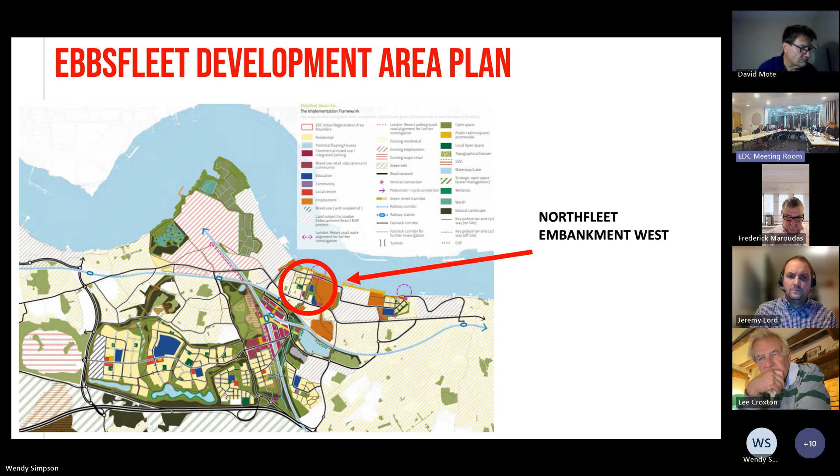The vacant and derelict Bevan's Jetty is also seen within the River Thames to the north.

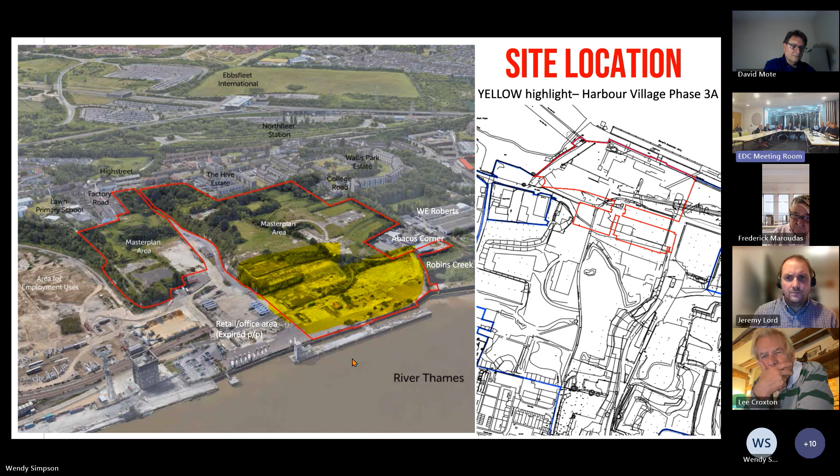The key matters for the development relate to the creation of a sustainable and high quality riverside place, including new dwellings and open space, the living conditions of future occupiers of the proposed units, the impact of the development on the living conditions of residential neighbours, the impact on non-residential neighbours, matters of flood risk, impact on highways, as well as matters of ecology and heritage interests of the area.

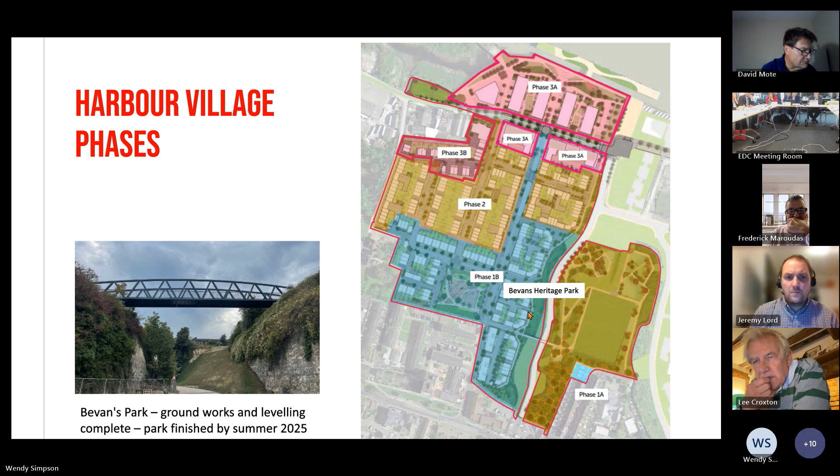This slide shows the proposed layout with 7 buildings, 5 to the north of the new fast track route that will run through the site, and 2 to the south of the fast track route.

All of these blocks meet the height of the approved parameter plans, arranged from 4 stories in the southern area, rising to 5 and then 9 stories, with a 9-story landmark tower facing more towards Robins Creek in the northern sector.

Blocks D, E, F and G have podium level gardens, communal gardens for residents on the roof of parking areas.

Adjacent to Robins Creek and the River Thames, there is public open space in the form of a promenade park, through which the King Charles III England Coast Path will be routed.

Starting with the northern part of the site, the ground floor layout of the buildings comprises internal parking areas, entrance lobbies, cycle parking, ancillary plant rooms and bin stores, and also a significant amount of active frontage onto the public realm and the streets.

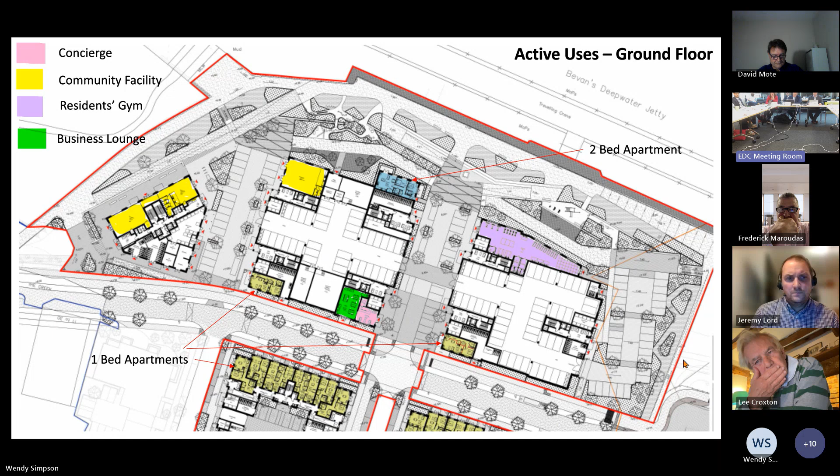This slide just shows some of the active frontage areas.

The design narrative for this northern part of the site responds to the industrial riverside character area within the master plan. The design of the 4 blocks D to G invokes a sense of historic riverside warehousing, with equal spacing, repetition of built form, ranging perpendicular to the riverfront. The linear form of the buildings, construction, and intelligent detailing draws on gable roof forms with chimneys.

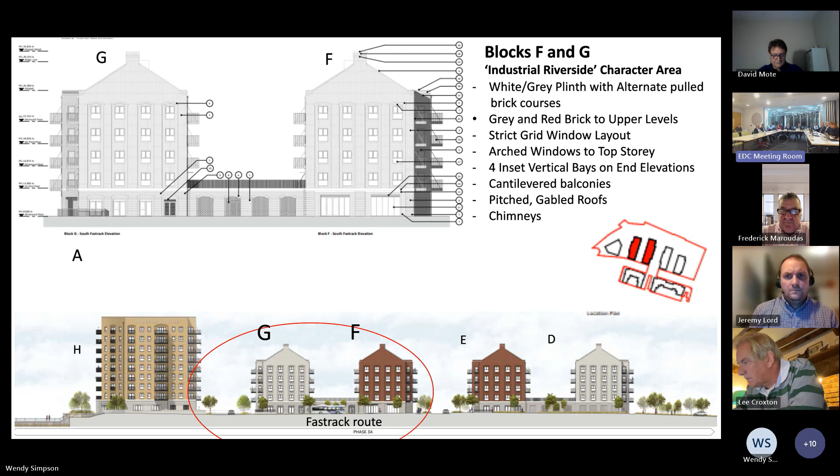This slide illustrates some of the careful detailing of the entrances, showing the high quality finish proposed for the built form.

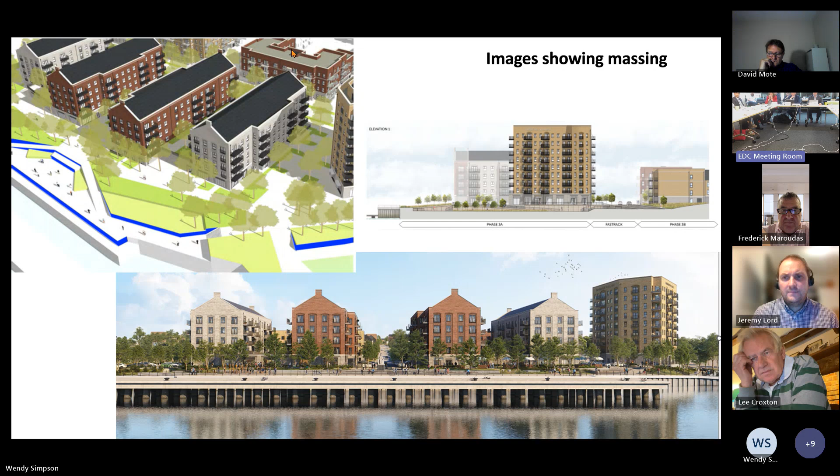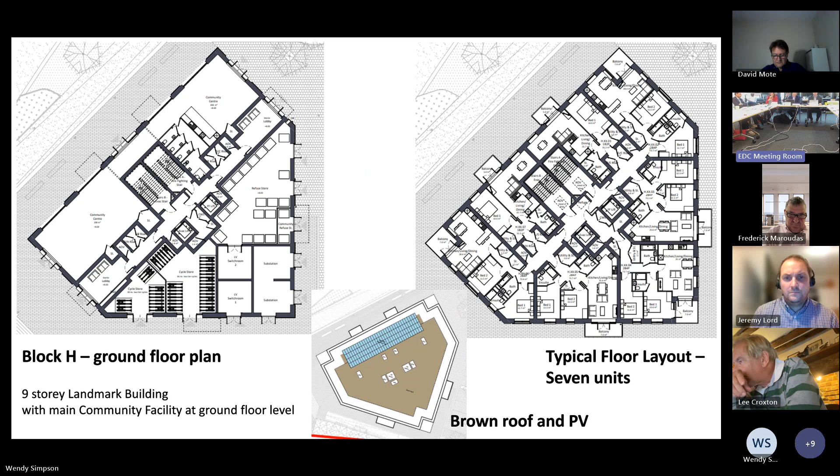On the pitched roofs, blocks D to G would have PV panels.

The design of the landmark tower is seen here with large distinctive signage on the 2 facades, referencing industrial warehousing.

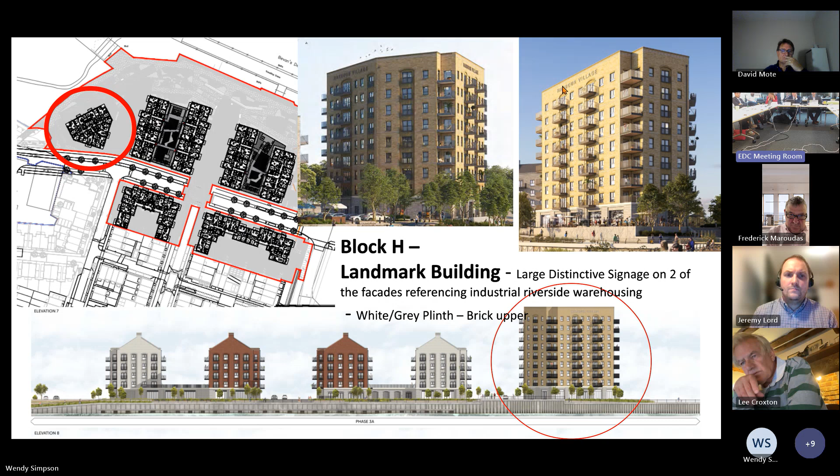The Riverside Promenade Park has had to be carefully planned to provide a green and high quality public realm with the various requirements of the park, such as heritage boards, play and gym equipment and artwork, while also providing level access with the Environment Agency to access the existing flood defences.

As the site is located in flood zone 3, buildings have a finished floor level of 8 metres AOD, and a series of steps and slopes provide access down to the England Coast Path level.

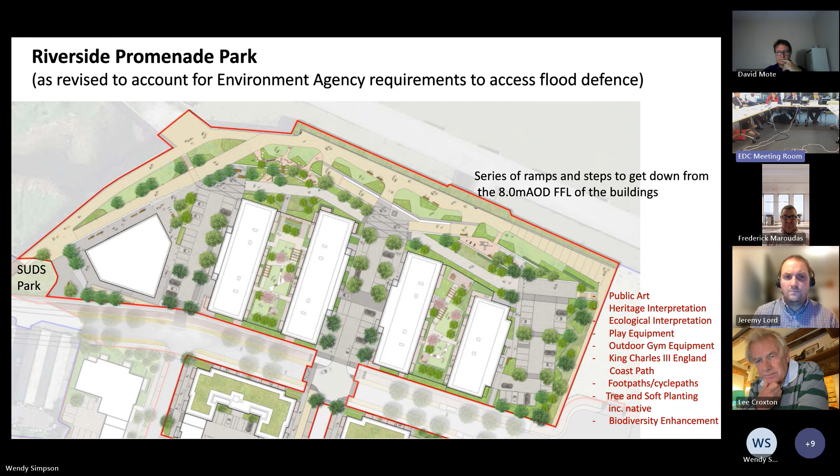This slide shows some of the tracking for the operational vehicles that are required to access the flood defences for repair and maintenance associated with the Environment Agency.

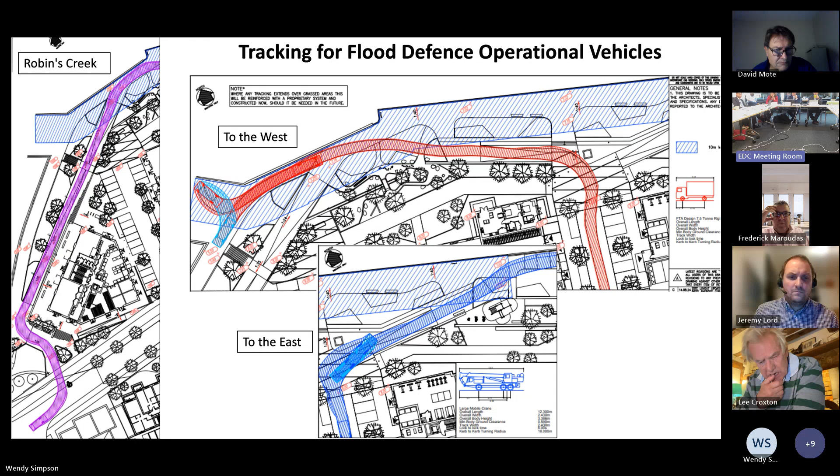We then have this slide showing the routing of refuse and emergency vehicles by what is otherwise a dedicated footway cycleway to the north of the buildings, and at all other times this is to be a blocked, bollarded and locked route.

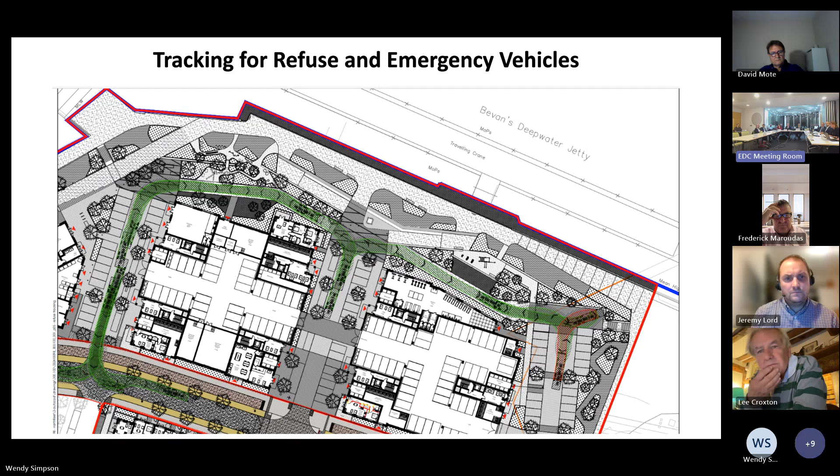This slide illustrates some of the changing levels from block H of the community facility down to the riverside. It also has a flood defence operational area, which is level for an Environment Agency requirement, but still incorporates lawn and shrub planting and requires installation of demountable street furniture within that zone.

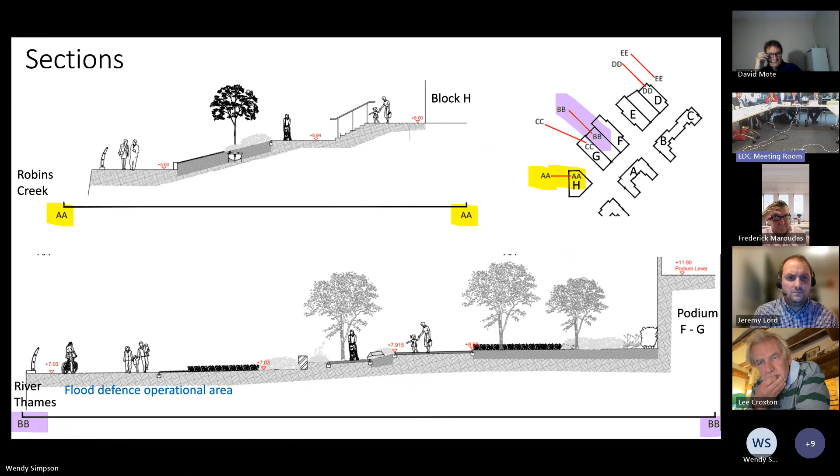This slide shows the configuration of the community facility. The planning condition on the outline requires provision of 250 square metres minimum for the community facility. There is about 300 square metres shown here, divided between buildings H and G. There are 3 parking spaces provided for dedicated use of the community facility, and suggested condition 23 requires agreement of a community building management plan.

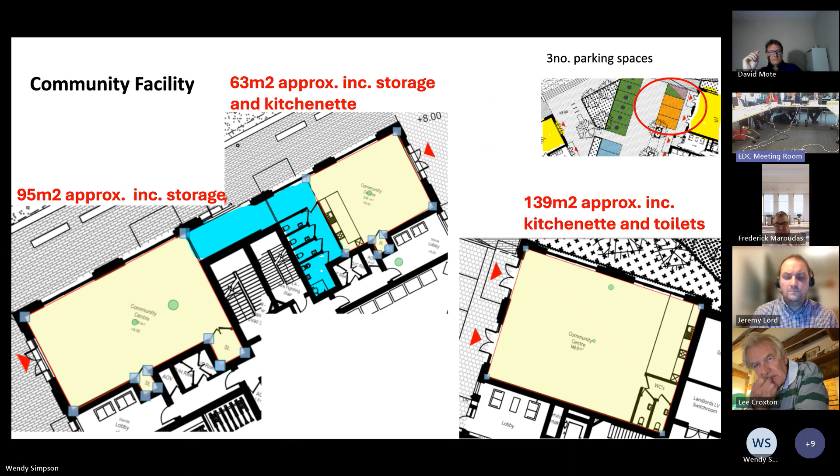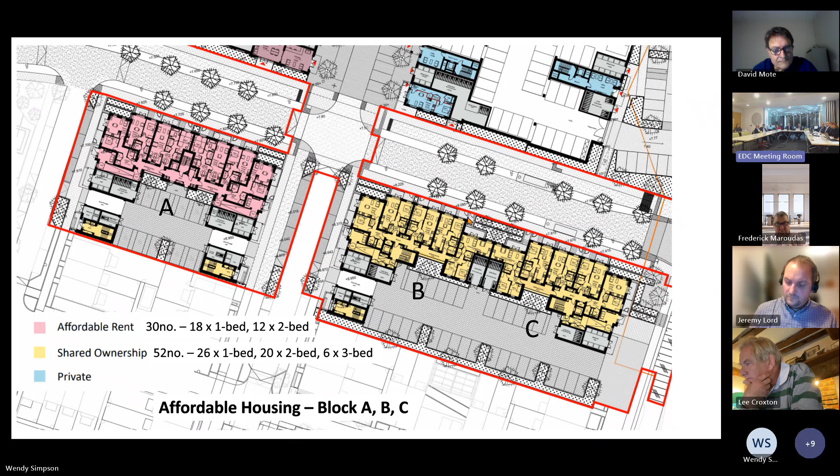In the southern part of the site, block A will provide 30 units of affordable rent, and B and C will provide 52 units of shared ownership. This altogether equates to 30% affordable housing in a tenure split in accordance with the Section 106. In block A, there are 8 M4 Part 3 units, housing for people with mobility issues, which is 2 more than the requirement of 6 in the Section 106.

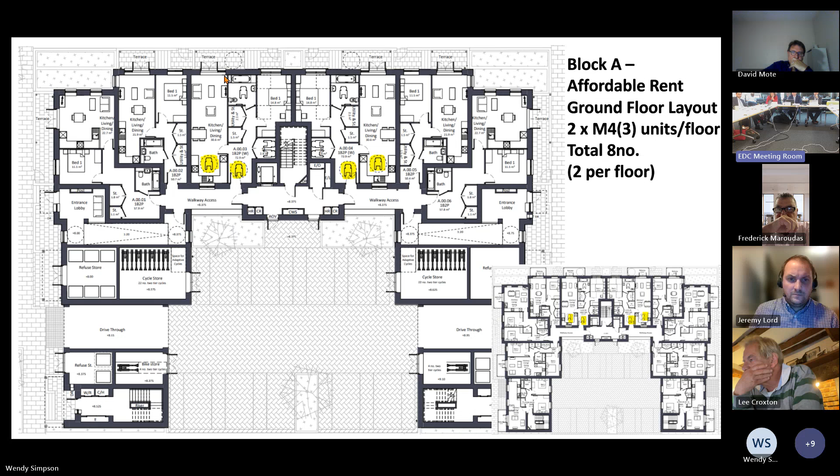The majority of apartments within blocks A, B and C are dual aspect to provide better living conditions for occupiers. The ground floor apartments have direct access to the street, increasing their usability and street level activity. Architecturally, these 2 blocks respond well to the Georgian Town Character Area brief within the master plan. The bottom picture shows the direct access of the ground floor level unit to the street.

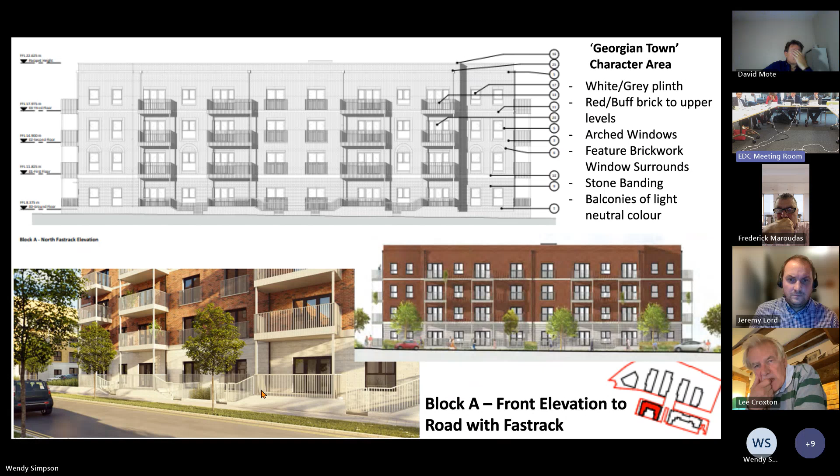At the bottom part here, you can see how the building responds to the phase 2 buildings, which are houses, with a slight step down in stories to the rear.

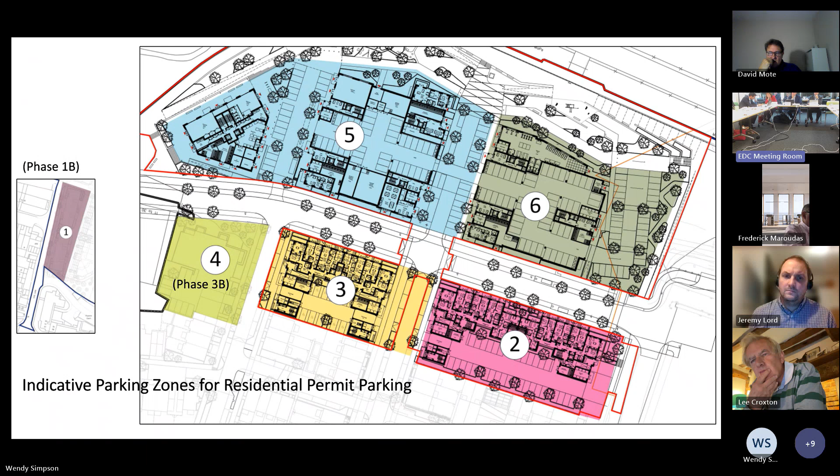What we have here are the 6 indicative parking zones for those who have parking permits and live within the development. About 86 of the units are car-free units. In addition to the parking spaces, the applicant has agreed payment of a unilateral undertaking to Gravesham Borough Council to potentially install and manage a controlled parking zone within adjacent neighbouring streets. Within the site itself, all streets are to be retained in private ownership, and there's a suggested condition for a parking management plan.

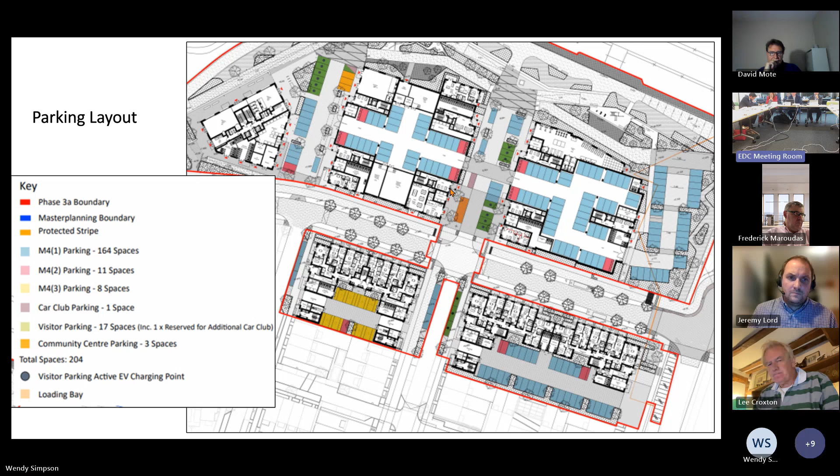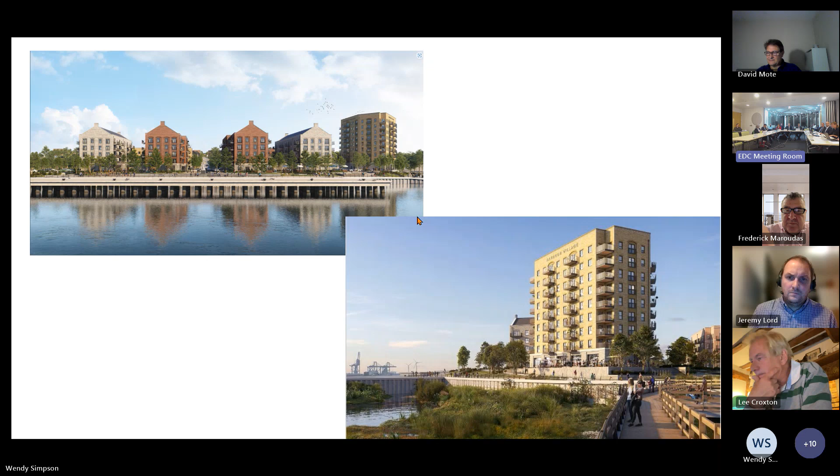Overall, the proposal performs well against the building topics, with 10 greens and 2 ambers. It broadly accords with the principles and parameters established by the Outline Planning Permission, the Master Plan and planning policies, as well as meeting EDC's aspirations for the Northfleet Riverside, for high quality residential development and community facility. This application is accordingly recommended for approval, subject to the conditions laid out in the report and the planning obligations set out.

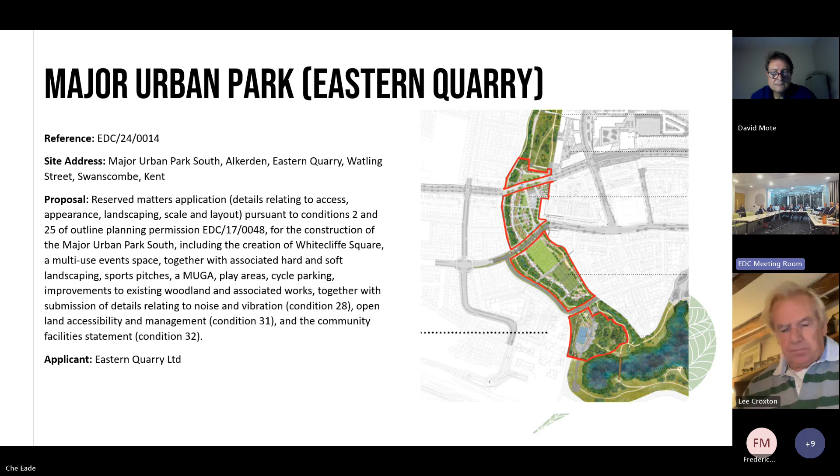The application is made in pursuant to conditions 2 and 25 of Eastern Quarry Outline Permission. The site is located within the Eastern Quarry, also known as Whitecliffe, which forms a strategic development site within the EDC area, comprising 3 urban villages: Ashmere, Alkerden and Castle Hill. Built-up areas are separated by accessible open space, including the major urban park situated between Alkerden and Ashmere. The master plan for Whitecliffe embeds principles of sustainability, creating walkable neighbourhoods, ensuring this leading outdoor space will be within a 10-minute walk for most residents within Eastern Quarry.

The fast-track bus service also runs through the centre of the site, intersecting the park, facilitating easy access via public transport from neighbouring communities in both Dartford and Gravesham. The site encompasses the southern phases of the major urban park between the market centre and approved Alkerden South residential phase to the east, and the future phases of Ashmere to the west, and extends approximately 5.5 hectares. It broadly forms a linear corridor which is subdivided by 3 roads: Fast Track, the Primary Road South, and Alkerden South Secondary Street.

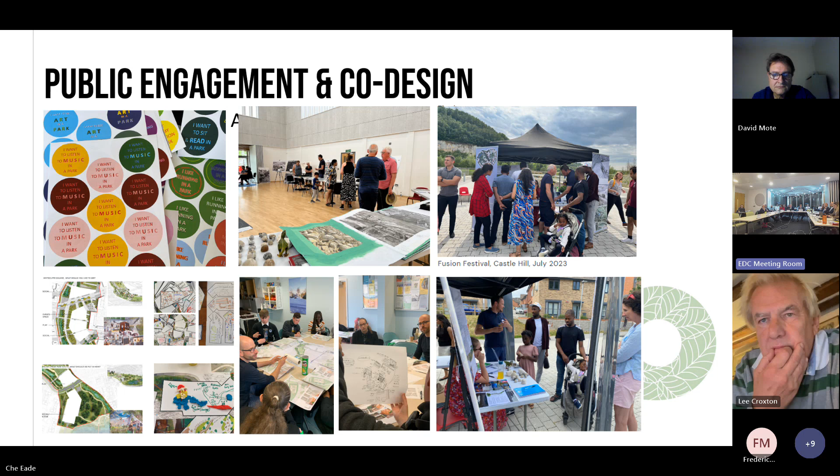Before we get into the detail of the scheme, I'd like to highlight that the design of the park and its facilities have been influenced by community feedback captured through a well-publicised programme of public engagement events and co-design workshops undertaken by the applicant's team. This has shaped the proposals, including provision of a wheelchair accessible community garden, teen-focused social spaces, skate park elements and basketball MUGA. Opportunities for further co-design are also identified by the applicants and have been secured by condition.

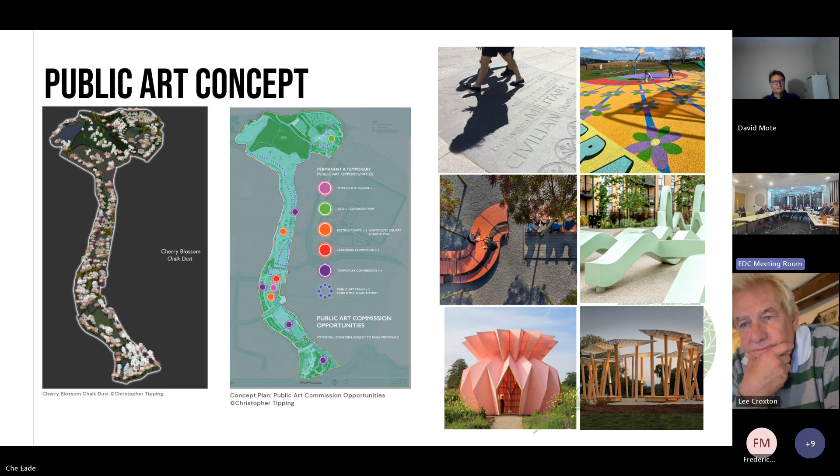The landscape design has also been influenced by the work of the principal artist, Christopher Tipping, reflecting the site's rich history and unique character. Chris has also worked with the designers to identify specific public art commissioning opportunities for the park as a whole, including a landmark canopy within the urban square, bespoke seating and embedded artworks which can link together, creating public art trails. An indicative delivery plan has been provided, which broadly accords with the Area Master Plan and Design Code and the overarching public art strategy secured by the Outline Planning Permission. Final design details and timings for delivery are secured by condition.

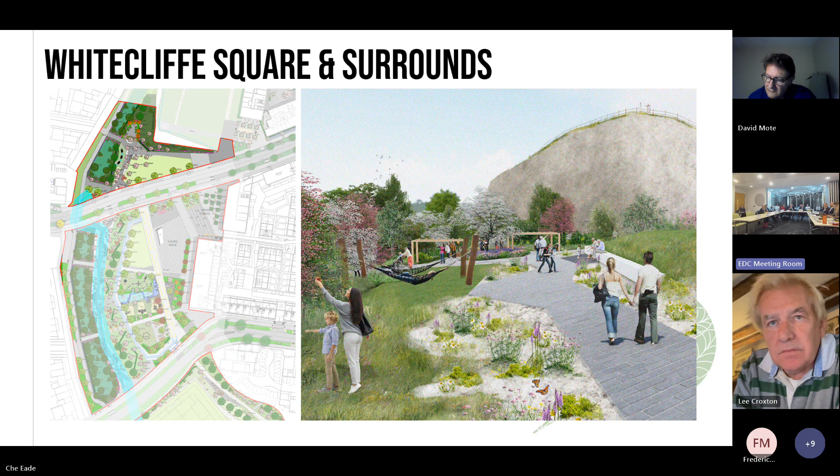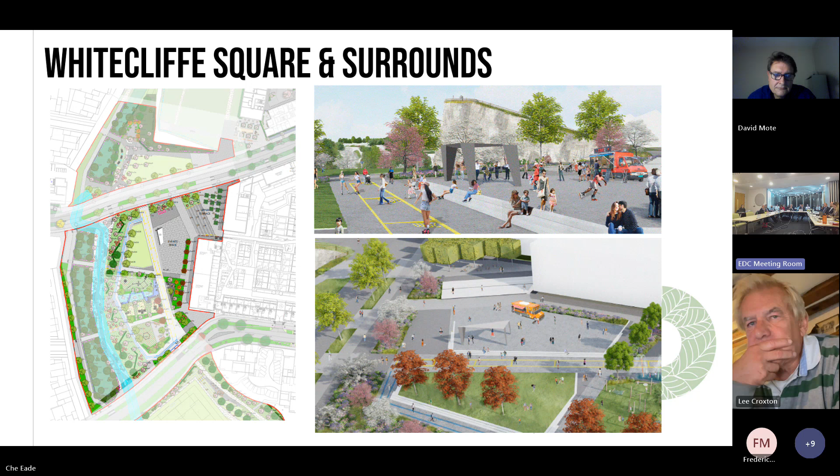South of Fast Track, Whitecliffe Urban Square provides a key hard landscaped community space which can accommodate various community events. This space is accompanied by grass lawns and cafe spill-out spaces from the adjoining market centre and the public art canopy structure previously referenced. Further south, the space accommodates the first play area, which utilises the quarry and character of the site. Motion-activated water play feeds into accessible water rills and collection pools and can be manipulated via mini dams.

Wheelchair-accessible play diggers will allow all children to take part in excavating and moving sand and play gravel, and concrete pipes are utilised throughout the space, providing opportunities for climbing, jumping and passing through. Beyond the principal play area, informally grouped lounge-style seating, pergola structures and a group swing have been incorporated with the Make Space for Girls campaign in mind.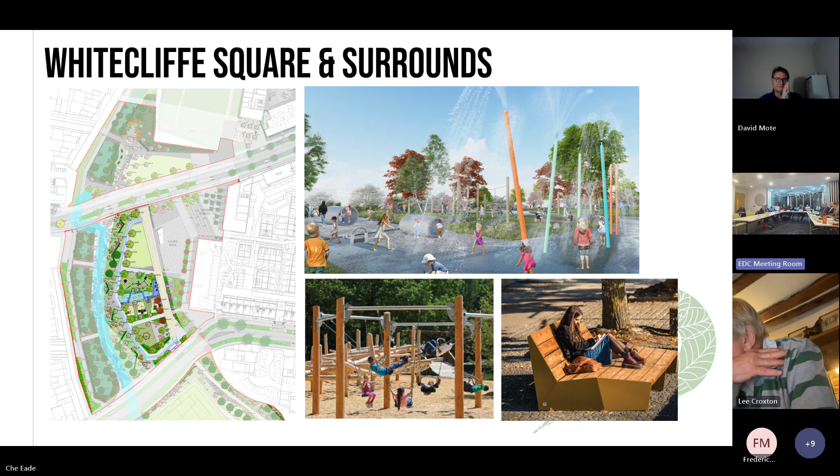To the south of Whitecliffe Square, a 9v9 grass football pitch has been designed for informal use by the public and should operate for the benefit of the whole community, not only for the playing of football. Four securely fenced tennis and netball courts will be available to members of the public via a booking system, similar to that established at Castle Hill tennis courts.

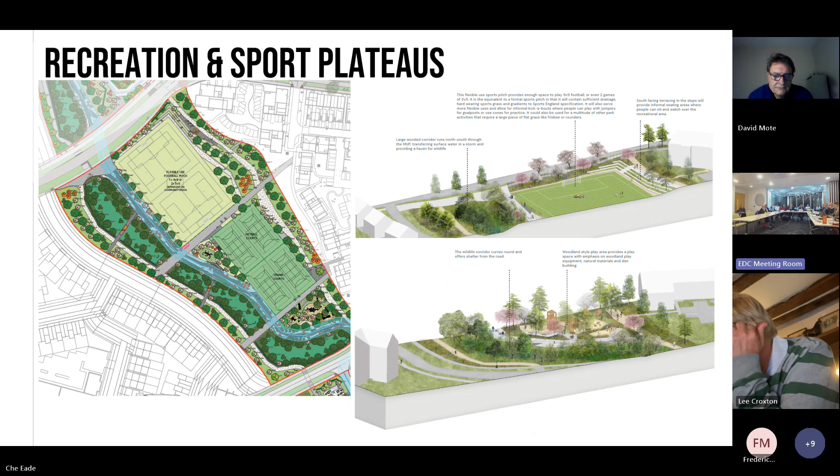West of the courts, an outdoor gym area is proposed, and beyond the courts to the south, a second neighbourhood-equipped play area is designed around woodland activities. Specification details for outdoor gym and play are secured by conditions, alongside full construction details of the sports pitch, courts and access and management plans.

To the southern extent of the park, a wheelchair accessible community garden has been co-designed with Ebbsfleet Design Group and Cement Fields, and will focus on the reuse of materials to provide planting containers and other elements.

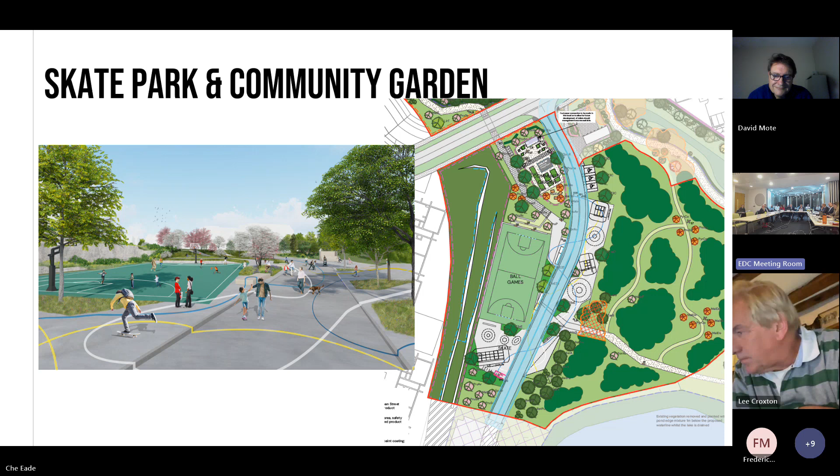Adjacent to this area, the basketball and 5-a-side football MUGA is proposed in an open court design to encourage a wider range of users. The MUGA is complemented by hard landscaping, playful line marking, skate park elements and robust street furniture, all aimed at young adults and teenagers.

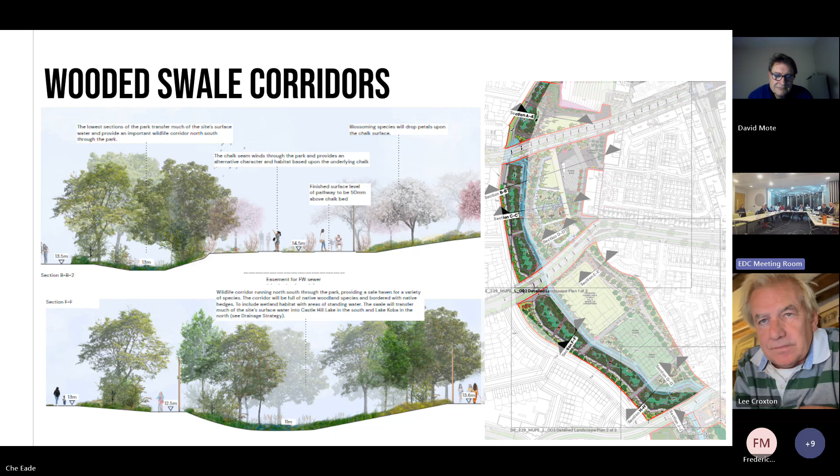Common design elements have been woven through the length of the park. These include wooded swale corridors which run along the western boundary and circulate the site's surface water. Adjoining the swales, the chalk seam walk winds through the park and is designed to provide an alternative walkway and a character and habitat based upon the underlying chalk of the quarry.

Soft landscaping has also been specified to dynamically reference the site's history through the use of flowering specimen trees, which in blossom will create a temporary spectacle reflecting Alkerden's heritage from fruit farming to chalk dust.

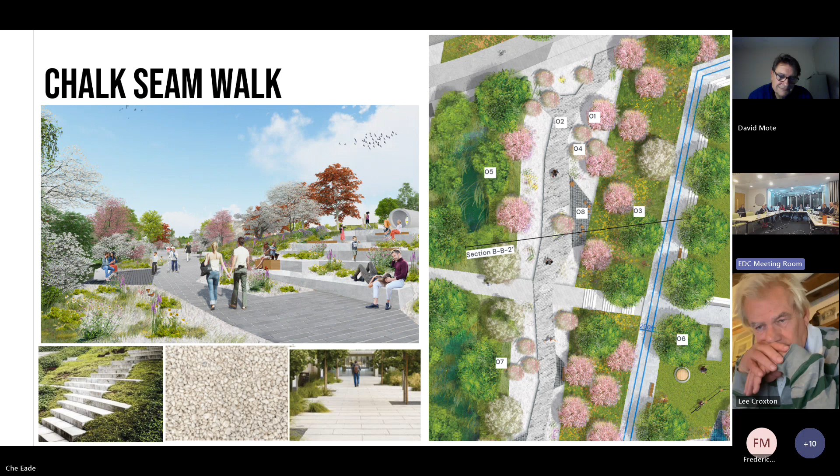Given the park is situated amongst residential development and integrated with Fastrack, most visitors will walk, cycle or take public transport. Thus, formal vehicle routes within the park are limited to a small section within the south of the scheme, serving 3 proposed disabled parking bays and the existing wastewater treatment works.

Numerous routes suitable for walking and cycling integrate well to the site-wide movement routes. Principal east-west connections are predominantly focused on pedestrian movement, while wide, informal leisure routes shared by pedestrians and cyclists run north to south on either side of the park. These connect into the circular leisure routes around Castle Hill, up to the market centre, and facilitate 2 points of connection for the Major Urban Park North scheme when that comes forward.

Cycle parking is also well provided for, with 115 cycle spaces provided across the key focal points.

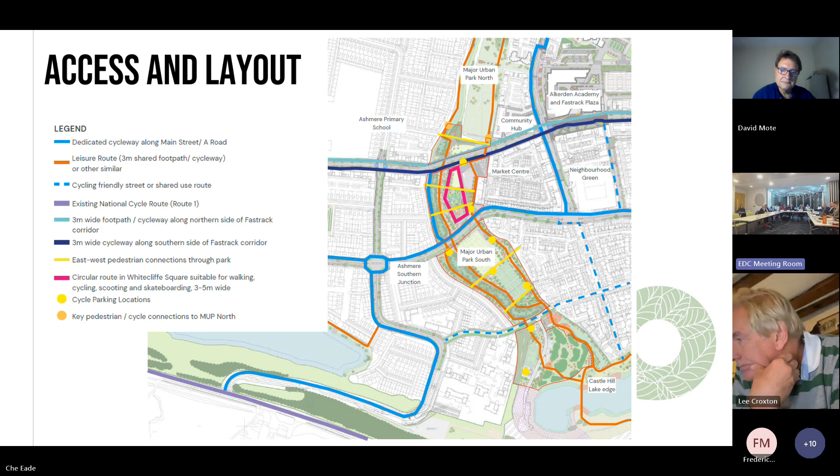Secured by design, safer parks and make space for girls design principles have been considered to improve the safety and inclusion of all users, especially women and girls. The design ensures all edges are well surveilled by adjoining residential and commercial developments. Active uses of facilities have been distributed through the park, which create a busier, active public realm where people can feel safe. Physical barriers around the football, basketball, Muga and skate areas have been removed to make these areas more attractive to a wider range of people, and planting is planned and managed to assist visibility.

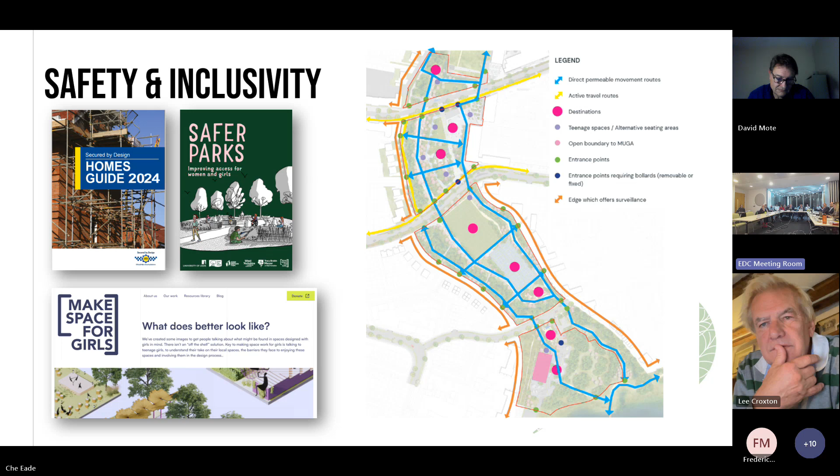Inclusive design has also been considered in a range of routes and spaces within the park, specifically catering for users with different neurodivergent needs, such as dementia and autism, and is considered to be accessible to an ageing population with minor design improvements secured by condition.

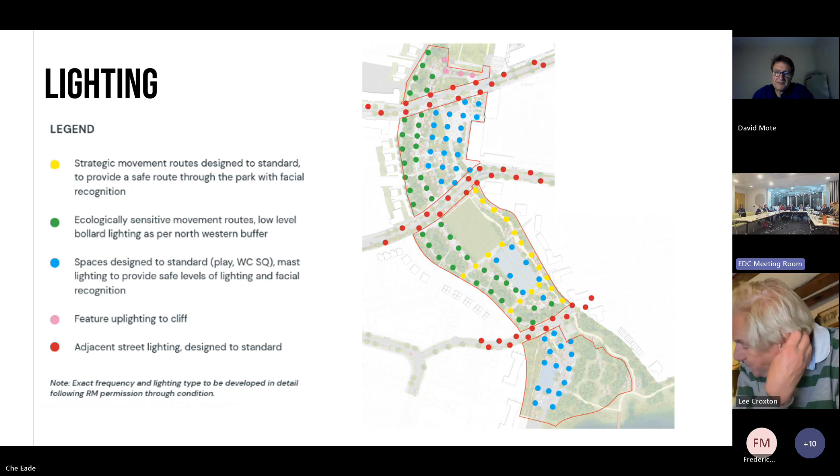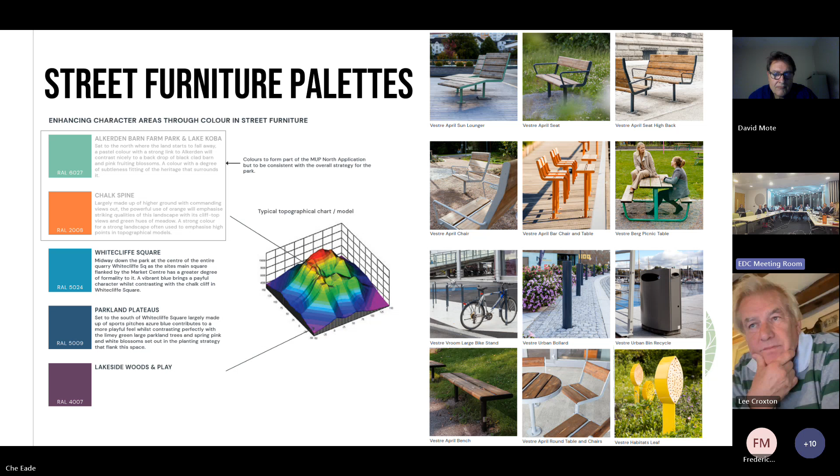The security of the park is also assisted by an appropriate lighting strategy, which includes low-level bollard lighting, pedestrian masts, and lighting to sports facilities, with detailed lighting plans to be secured by condition. These are complemented by a well-considered colourful street furniture concept for the full length of the park, zoning colours to enhance the different character areas and assist wayfinding.

Proposed planting across the park provides a great variety of flowering for pollinators and puts forward a strategy for natural regeneration, which should result in the best establishment of the right plants in the right place and resilient planting in terms of drought, biosecurity and ecology.

The proposed hard material palette is largely consistent with the materials previously used in the quarry, with additional clay pavers and crushed chalk as part of the distinctive chalk seam pathway, and black tarmac enlivened with colourful line marking as part of the youth and play areas. Final details and samples of hard surfacing materials, alongside detailed planting plans, are to be conditioned.

As summarised in the committee report, the design, layout and access to the proposed sports and recreational facilities are considered to be in general compliance with the requirements of the Section 106 and the Community and Leisure Facilities Strategy secured by the Outline Planning Permission.

Planning conditions are also proposed to secure that construction and surfacing will accord with relevant Sport England guidance.

In respect of sustainability, consideration is given to water consumption and carbon emissions associated with the construction and operational phases of the development. Planting has been designed to be low maintenance and drought tolerant. Water play elements use clean water supplies, which are less likely to become a future maintenance burden. Reductions have been made in the design process to reduce the overall hard landscaped areas and associated embodied carbon.

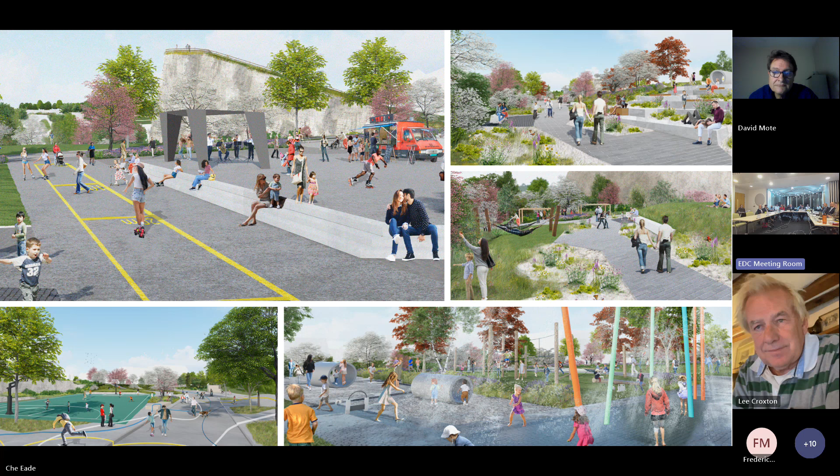Overall, the proposals are of an exceptionally high quality and provide a wide range of recreational function and facilities. The proposals align well with the Area Master Plan and Design Code for Alkerden, setting out a good quality design, achieving 10 out of 12 greens in the Building with Nature assessment and 41 greens across the 9 public health check indicators assessed as part of the Ebbsfleet Park and Open Space Design Criteria.

In conclusion, this is a positive and commendable scheme which will deliver a series of high quality, accessible, green and blue spaces for the growing community, and a significant piece of green infrastructure within Ebbsfleet. It is therefore recommended for approval, subject to the conditions detailed in the committee report and supplementary information.

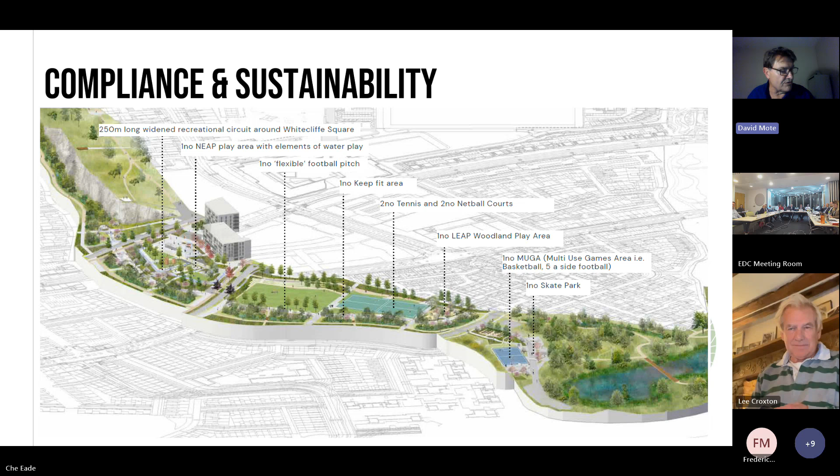So I also echo Neil's thoughts about access to this area from other areas. It was said that it will be easy, but I don't think it will be, to be honest, because all these routes run east to west. Very few run north into the existing communities, as far as I can see. So unless they drill a hole through the spine at Bluewater, it may not be quite as easy for people to access this from outside the area.

But it is there for the people in the area, because a lot of their management fee will be paying for this, along with other contributory factors. Sorry, I'm rambling, but my concern is that people attending or wanting to enjoy these areas from outside will drive there. And I have a bad feeling, like with the existing Castle Hill or its early stages, where people from surrounding areas parked all around residential areas to get to the new swings that were built there, because it was an exemplary play area everybody wanted to use. Is that being taken into consideration, or are we hoping everyone will walk there?

Che, perhaps you can answer this. It's close to the market centre where you're going to have a small town centre, so there will be public parking facilities as part of the market centre within Alkerden, adjoining the centre of the major urban park, to the south of this particular application site.

So that's where you'll have the opportunity for private parking vehicles. The residential schemes adjoining the park will have their own management scheme, with parking management regimes introduced as and when issues of indiscriminate or outside parking arise. I think it's reliant, within the existing phases of Castle Hill, on having some kind of parking management regime to prevent indiscriminate parking from outside the area, drawing people instead to access the park via sustainable modes - Fastrack, and the connections through from the north, which are expected from Swanscombe and Greenhithe as well.

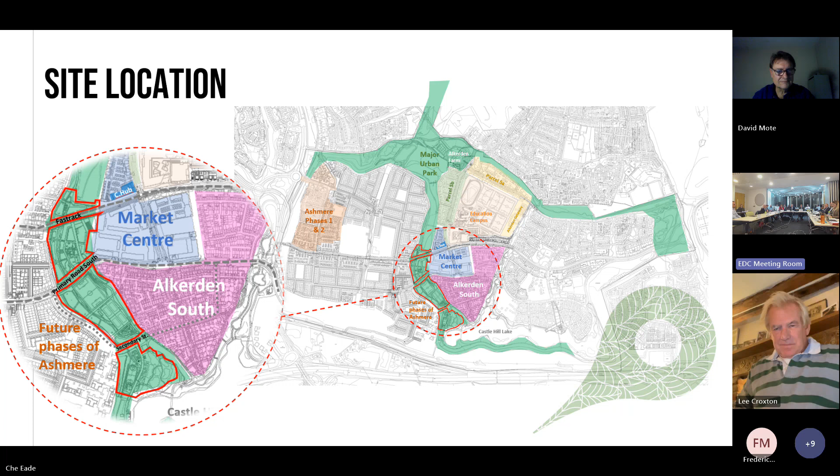Can I just ask, regarding public toilets, the intention was that the hub would provide that. How far is the walk from the Southern Park to the hub if you've got a desperate child? I'll put this one up here, which gives you your 5-minute and 10-minute walking radius.

And the hub is right about where my cursor is hovering there, so within a 5 or a 10-minute walk from the extent of the entire park.

I think it's also relevant to note that the applicant raised concerns with the ongoing maintenance of putting toilet facilities in from day one, but have future-proofed it should the ability to put them in at a later date come forward, and the funding mechanisms to do that, being that the majority of residents should be using them from the surrounding areas. There may not be that requirement, but that gives you the idea of how far you would have to go from the southern extent - a 5-minute walk up the park.

Thank you. Yeah, and I was going to ask about the future proofing because I thought I'd read that. Thank you, Che. Any other contributions on the park?

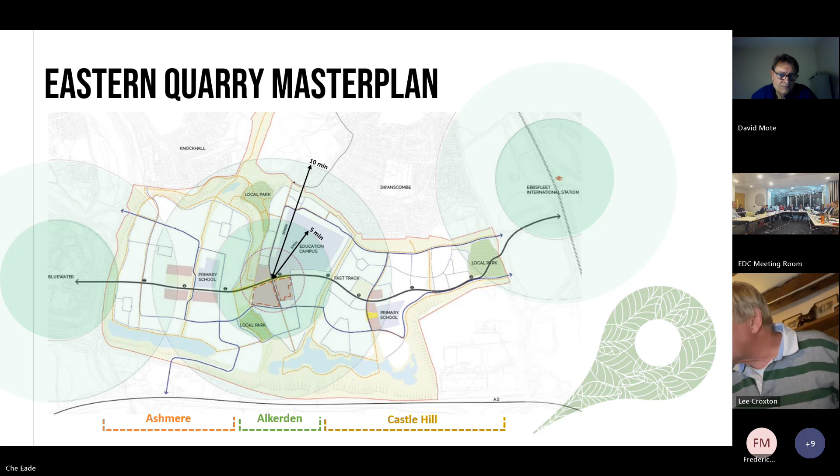No. Well, we ought to move to a vote, and we do it properly this time. So we've got a recommendation to approve, subject to conditions. Those in favour?

Right, let's move on. It's worth noting, isn't it, that I think David Mote left the meeting? Yes, but he was there and he voted on that item.

So next on our list is the sustainability assessment, and thank you, Chair. I'm going to try and take you through this. The work has been undertaken over the last few months.

There was previous briefings with the committee during the drafting of the document, led by Simon, head of design at EDC, who the committee will know. Following that engagement with the committee, consultation took place over the summer period, heading into October. That also included a session with some stakeholders. We invited the developers currently active in Ebbsfleet, and that was attended by various developers and their sustainability advisors. So that was a helpful session.

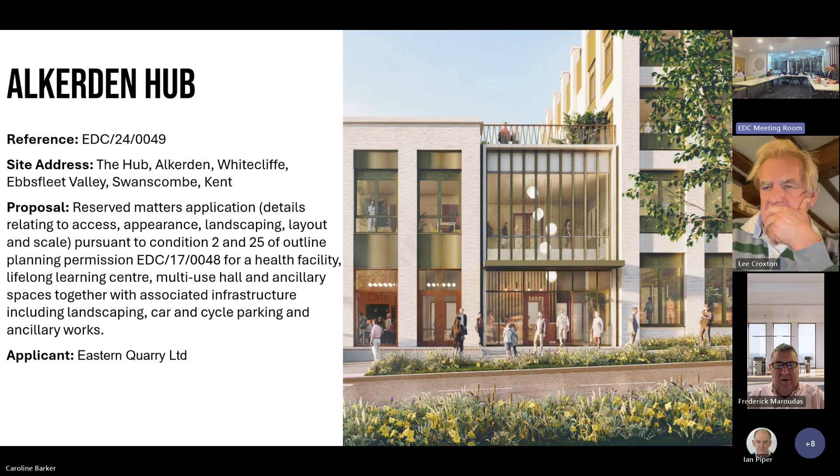Of note for this scheme is the obligations for community spaces as set out in Section 106 Agreement and Community and Leisure Facilities Strategy. By way of context, the Eastern Quarry Master Plan secured under the outline comprises 3 villages, separated by areas of landscaped open space.

5 and 10-minute walking radii are shown on the main plan, highlighting the principles of sustainable travel by creating walkable neighbourhoods, as well as a fast-track corridor which runs centrally through the middle of the site. Orange shaded areas identify the centres in each village, Alkerden Market Centre being the principal of the 3 centres.

And the heart of the development site. The application is located at the very core of Alkerden Market Centre and would serve as a centrepiece of the site to deliver essential facilities for the rapidly growing community. By way of delivery, the hub would be anticipated to open March 27, by which time several other key development projects would also be delivered.

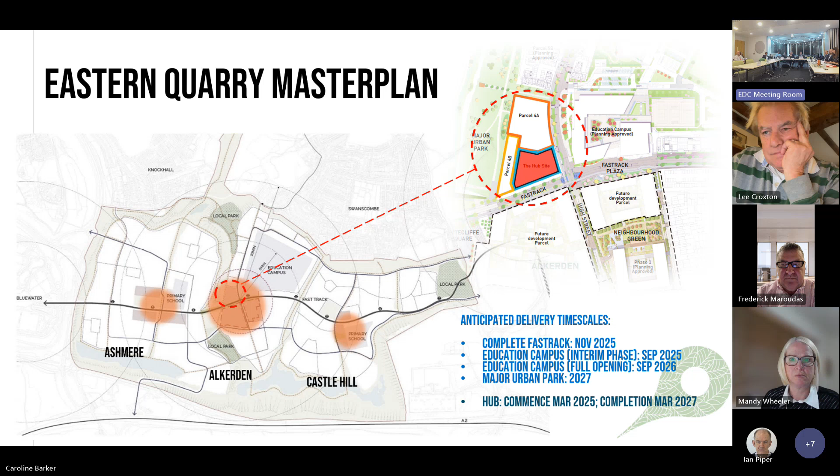The application site is located in a highly sustainable location on a principal junction between Fast Track and the North-South Primary Street. Site level changes, which fall from north-east to south-west by 5 metres, have been accommodated within the layout design of the building and surrounding ancillary space, providing full accessibility in and around the building. Access routes around the site are legible and prioritise active modes of transport.

Primary access would be provided from Fast Track on the principal elevation of the building, connecting pedestrian and cycle routes secured in the adjacent streets, with cycle parking located at the front of the building. A single vehicular access is proposed from the north-south primary street to the parking area at the rear of the building. The proposal demonstrates a good level of inclusive design, incorporating generous lift sizes to accommodate wheelchair use.

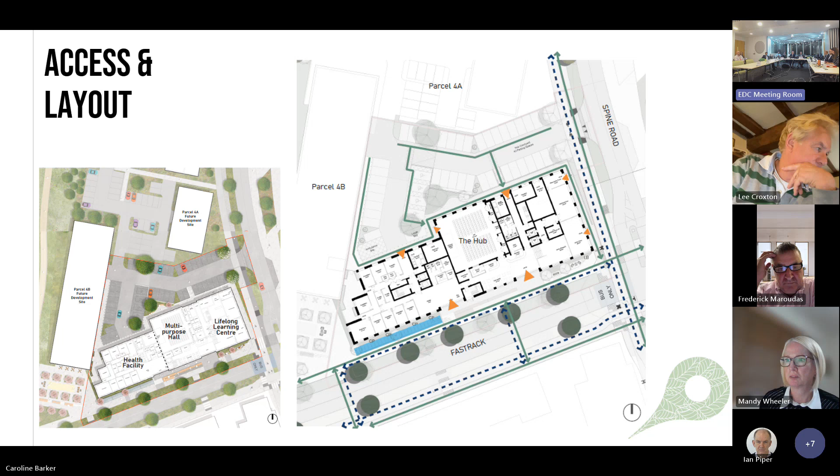The proposal seeks to deliver several community facilities obligated under the outline permission by combining them within a single building. The obligated spaces include a health facility, lifelong learning centre or LLC, social care provision, community police accommodation, job centre and religious facility. The outline permission identifies space requirements and finish for each of the facilities.

Since the outline permission was originally secured in 2007, delivery of services and best practice has moved on, identified through engagement with the local community, KCC, and the ICB, who are anticipated to operate spaces within the building. The prescription of space allocated to services under the outline is no longer reflective of the way these services are now delivered, and spatial requirements are smaller overall due to a desire to integrate services.

Notwithstanding uncertainties regarding the exact operation of the spaces due to ongoing discussions with operators, delivery of the requisite floor space has been demonstrated in compliance with the outline planning permission and shown on the floor plans on the slide. But the proposal seeks to deliver an enhanced scheme that provides a more bespoke range of uses in addition to the Section 106 requirements, whilst maintaining the delivery of the overall obligated floor space.

Complementary additional uses have been included to reflect the needs of the local community, and consequently, some uses have been reimagined, including the addition of co-working space, family hub, multi-purpose studios, and a cafe. The principle of co-location by delivering services in a single building is welcomed as best practice, providing a spatial focus within the development site, generating greater activity and footfall and better opportunities for the flexibility of spaces as demands evolve.

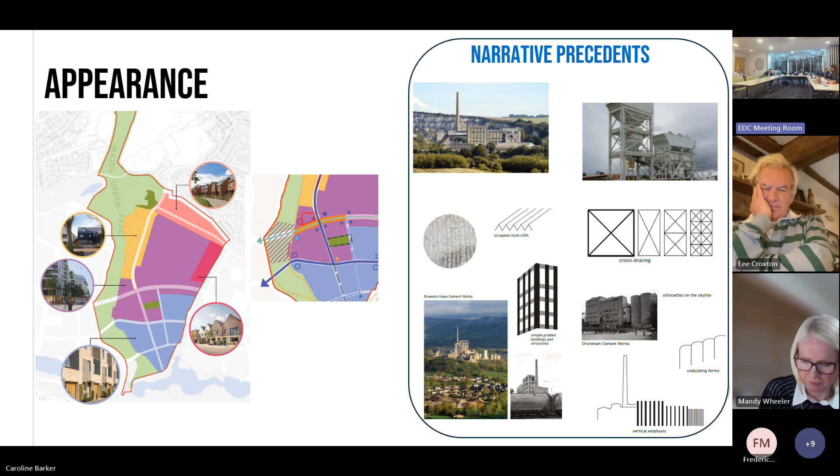The narrative fits well within a singular building of this scale and is specific to the site to help create an individual style. The scale and massing of the building rises from west to east, reaching its pinnacle on the eastern corner, where it is articulated as a 4-storey landmark tower that holds the corner at the main street intersection.

While the internal layout has been divided into 3 distinct areas, the facade has been successfully developed using a grid to establish a unifying order across the scheme to read as a single form reflective of its civic role.

In terms of materiality, the facades are expressed in light grey brick with light mortar, reflecting the colouring of the chalk. This is supplemented by contrasting but complementary feature green and orange tones that have been derived from the landscape of the cliffs and plants, together with distinct green fluted tile, which will create interest to the facade.

Bay studies have been developed to show the construction detail, including inset windows, coping and glazing sections to help secure the delivery of high quality detailing on site.

Of these, there is 1 servicing and delivery bay, 4 are accessible spaces, and 10% active and 10% passive EV charging provision will also be provided. The strategy also accommodates for parking to serve drop-off and pick-ups from the adjacent education campus, as secured under the campus reserved matters application of 11 spaces. 1 ambulance bay, as obligated under the outline permission, is also provided, together with 41 covered parking cycle spaces. The strategy aligns with the EDC sustainable transport strategy.

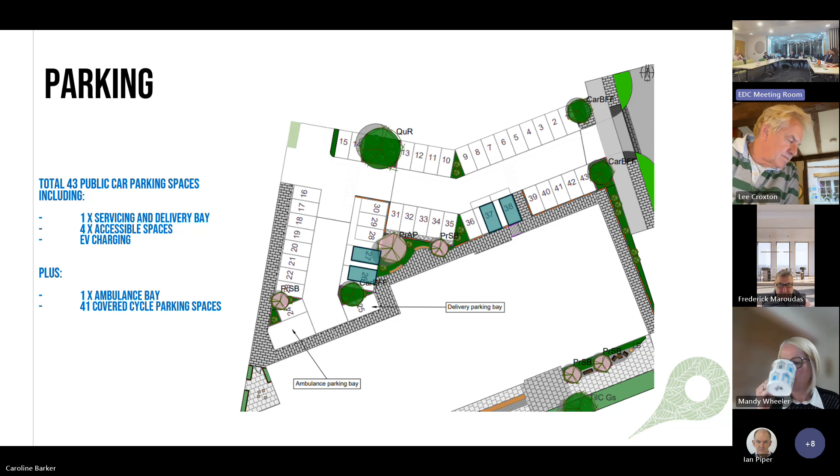Framework travel plans and management strategies have been provided to support the application, with final details to be secured by condition.

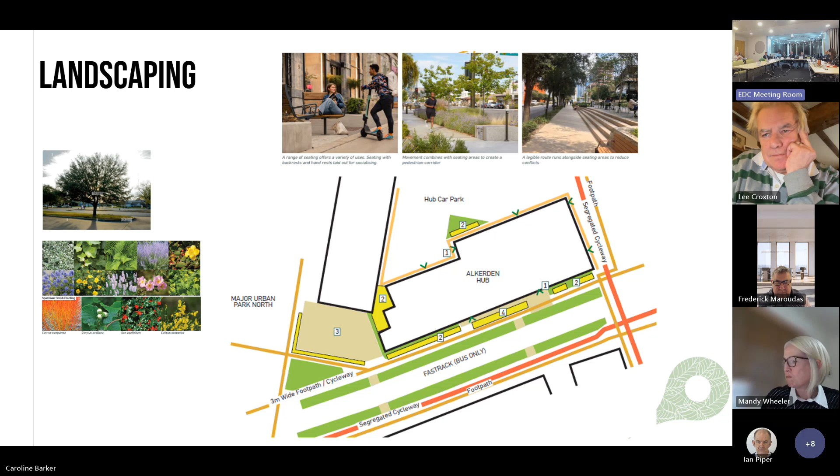With regards to sustainability, overall the building performs well. An energy statement has been developed following the Be Lean, Be Clean, Be Green energy hierarchy, incorporating a range of passive design and energy efficient measures, including natural ventilation.

The scheme has been tested against the EDC's emerging sustainability assessment, which identifies good levels of energy use intensity and performs well against waste materials, health and wellbeing, and natural environment requirements.

Concerns were raised in respect of overheating, concern that was also raised by the ICB, and window sizes have been reduced to help address this.

While future predicted weather scenarios show overheating to be a potential issue, the applicant proposes the use of mechanical cooling in the form of a variable refrigerant volume system, VRF, which is a form of air source heat pump.

PV panels are also provided for renewable energy, together with a green roof, to increase biodiversity and slow surface water runoff. The proposal comfortably hits a BREEAM Excellent rating.

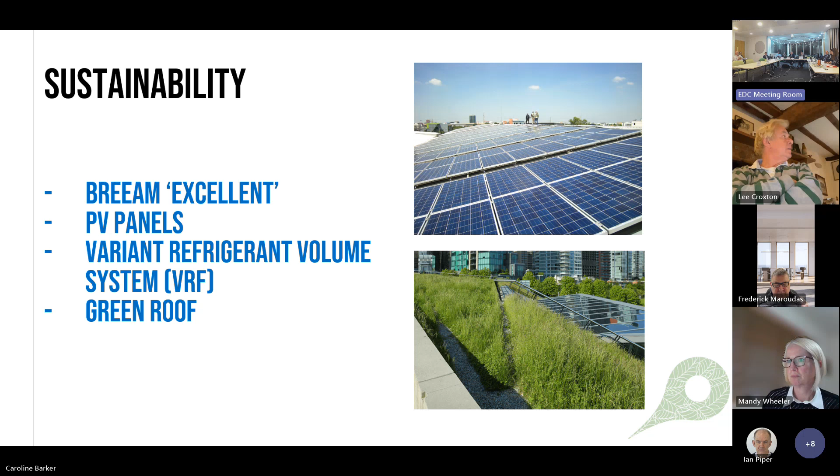The site is currently isolated from other sites and would not cause disturbance to neighbouring amenity. Testing has been undertaken to ensure noise can be controlled to a reasonable level.

Conditions have been imposed to further control the details of noise and management to prevent harmful amenity impacts arising from development. The building performs extremely well against the Building for Healthy Life framework, achieving 10 greens and 1 amber.

The applicant has worked well with EDC officers and engaged extensively to design a carefully considered and extremely well resolved building, both internally and externally, which complies with local and national policy and extends beyond the needs of the Outline Planning Permission, and would serve as a high quality, bespoke and vibrant landmark.

The application is therefore recommended for approval, subject to the conditions as listed in the report, including a pre-start condition, which has been agreed with the applicant, and the supplementary information.

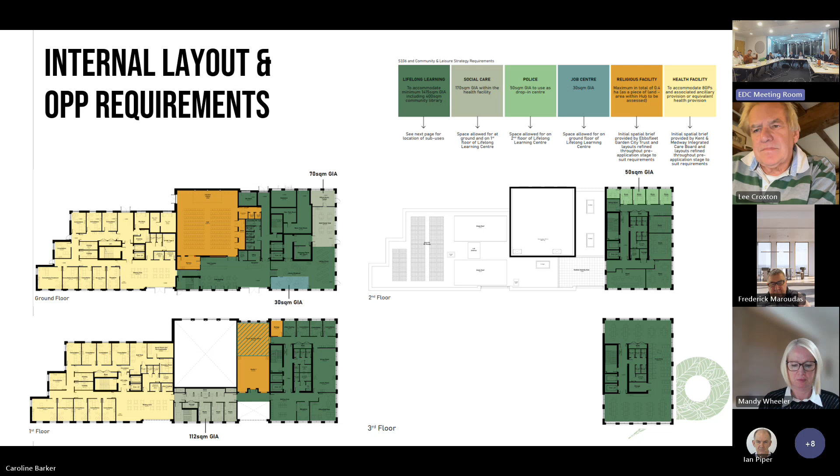So what will you see if you're on the fast track road? From the fast track, you won't see that. I think it'll only be visible in longer distance views, perhaps from the major urban park or from a higher elevation. But from the fast track, that will be hidden behind the primary facade.

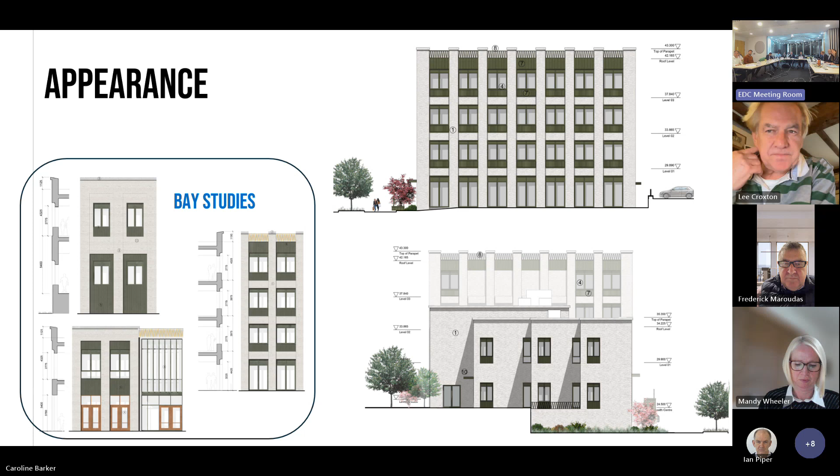If we go back to the CGI — sorry, there's some detailing on the bay studies, I think, that shows that little bit there. And then the CGI.

Yeah, so on the bottom, it's there. That's at roughly the same height as the railing that you see to the east. Yes, thank you, Lee.

Thank you, Neil. Whereas I don't think it's necessarily a planning consideration, I wonder if it is actually too small, and not as big a statement as we might have liked, because this is the community building, isn't it, the centre of a rising population. What troubles me is the hall can only accommodate 200 people. I live opposite a church which has between 400 and 600 people every Sunday, and this is going to be a multi-faith centre. I wonder if, in fact, we have not been as bold in terms of imagination as we might have been.

I'm also, again, I know this isn't a planning consideration, but at the time you're giving Kent County Council a very key role in this, when they're cutting down youth services and community activities. What worries me is, are we using this space to full capacity, and is it really the statement building that we all want? Having said that, in terms of facilities, I think that's really what the community needs, and I'm not going to criticise that in any way. Thank you, Neil.

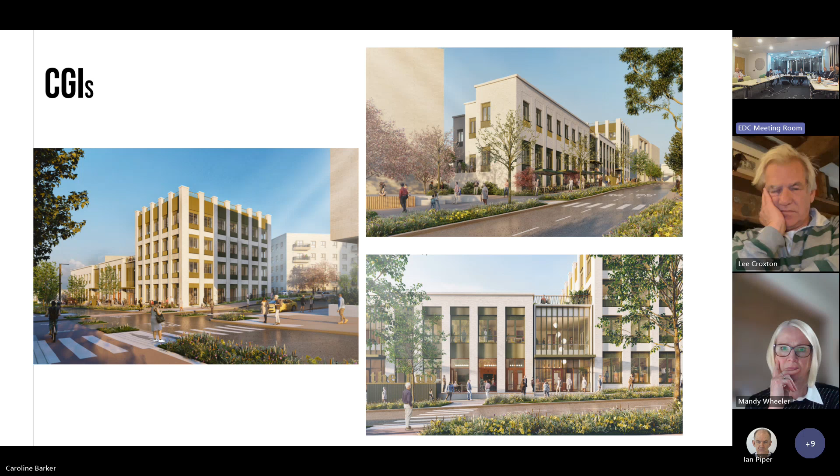We had a session with the architects to discuss making more of an emphasis around the design narrative and how that might be done. Principal concerns were around bringing the gridded feature to the fore, which wasn't as clear as on the previous plans.

Also, the monotony of the roof was flagged as a concern, just to create some more movement through that. There's also been a change in the scale of the windows as a result of considering overheating, so the depth of the glazing elements has been reduced, but the bays have been supplemented in depth by this fluted tile.

The roof detailing, the piers, have been continued upwards with the introduction of a feature railing, so the grid structure is more emphasised than it was previously, where it was just straight across. A similar principle has been applied in the entrance sections of the building, so there would be some movement up and down with the line of the roof.